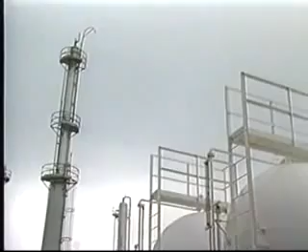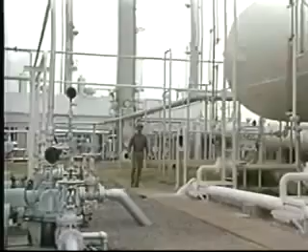This program is about pumps, specifically centrifugal pumps, and their use in oil and gas operations. When you're pumping air, oil, water, or NGLs, all pumps operate on one common principle: they move something from one place to another.

A lot of different types of pumps are used in the petroleum industry, but two kinds are seen most often. Those with pistons or gears are called positive displacement pumps, and those we'll talk about today are centrifugal pumps. Another module focuses on positive displacement pumps, so we won't spend any time on those right now.

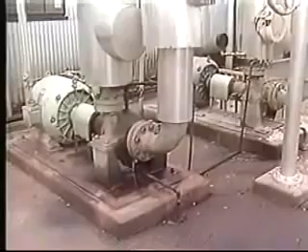So, when are centrifugal pumps used? Usually when you have to move a lot of fluid, like emptying storage tanks, moving processed fluids in gas plants, providing emergency fire water, circulating cooling tower water, and many other applications.

What we're saying is that you'll see and work with centrifugal pumps just about every day. So you need to understand them, and this module will help you do just that.

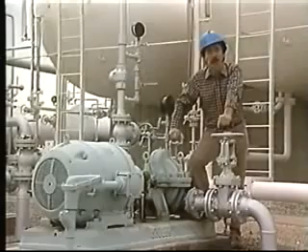This is the first section of a four-section module on centrifugal pump principles. This section introduces the various parts and operations of centrifugal pumps.

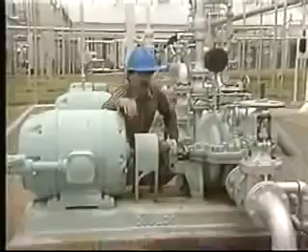Why are centrifugal pumps used so much? Because they're versatile, simple in construction, and relatively inexpensive to buy. They're also easier and less expensive to operate, maintain, and repair. But just what is a centrifugal pump? Let's start by looking at its primary components.

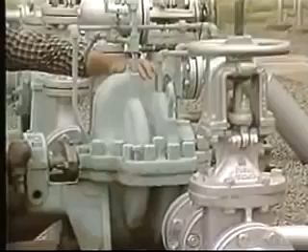When we break it down, we see that a centrifugal pump is actually quite simple, with only six main parts: the casing, the impeller, the shaft, the coupling, the bearings, and the seals, or packing.

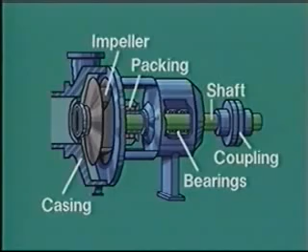Let's look first at the casing. It's the biggest and most obvious part. Its main job is to house and protect the pump parts inside. It can be made from cast iron, steel, bronze, or even special materials if that's what the job calls for.

This is the impeller. It's the part of the centrifugal pump that imparts energy to whatever fluid's being pumped. The impeller is tightly attached to the shaft and rotates at the shaft speed. Impellers can be made from different materials, most commonly cast iron. When corrosive fluids are being pumped, impellers are most often made of stainless steel, plastic, or some special material.

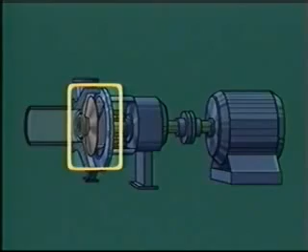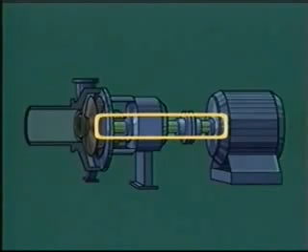This is the shaft. It's connected to a driver, which might be an electric motor, an engine, or a steam turbine. The shaft turns the impeller. Steel is the most common material for shafts.

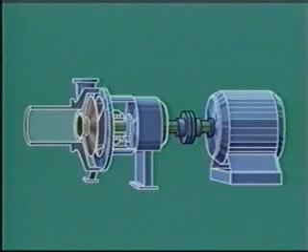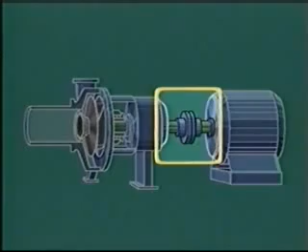Let's stop. Here's the driver. There's the pump itself. What links them? This, the coupling. It connects or couples the driver to the pump, to transmit power from the drive shaft to the pump shaft. Although they might seem simple, couplings are as critical as all the other components. They've got to be strong enough to withstand sudden changes in the pump's load and also those times when the driver might stop.

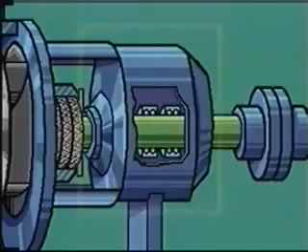Now to bearings. They support the shaft and reduce friction as it rotates in the casing. They do even more: they control the forward and backward thrust movement of the shaft, as well as the shaft's side-to-side, or radial, movement. That keeps the shaft from rubbing against the pump casing. Bearings can be here, in the pump casing on small process pumps, or separated in special housings on larger ones.

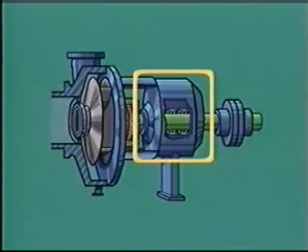Last, are seals, or packing. They're used to stop or cut fluid leakage around the shaft.

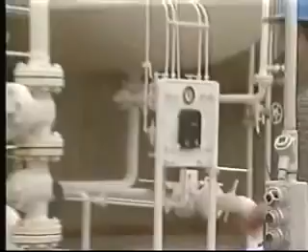That's how a centrifugal pump's built. Now let's see how it works. Centrifugal force is the key. It's that force that tends to move an object away from the center of rotation. Sound too theoretical? A common example will show that you already understand the principle.

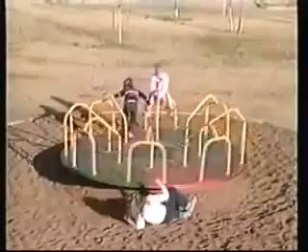The example: children riding a merry-go-round. They spin, and children move outward. As they do, they're subjected to a much stronger outward force that tends to force them off the ride. That outward movement is called centrifugal.

How does this relate to centrifugal pumps? In this way: when a centrifugal pump is working, the impeller rotates. Its blades stir the fluid, making that fluid rotate with the impeller itself. It's like a mini hurricane.

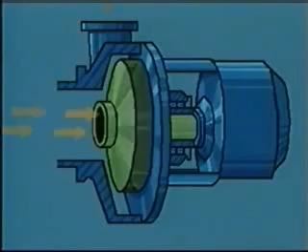The circular motion generates enough force to move the fluid away from the center of the impeller to the tips of the impeller blades. The movement of the fluid to the outside edge of the impeller creates a suction at the eye of the impeller that draws more fluid into the pump.

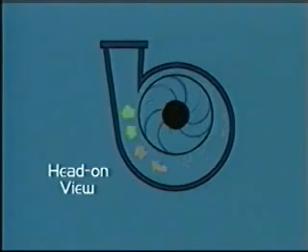If we look at the movement of an impeller, we note that the outside edge of the impeller travels faster than the inside center. So, to stay up with the impeller, the fluid has to move faster as it moves outward. That increases the energy of the fluid.

The fluid leaves the outside edge of the impeller. As it does, what happens? It enters a specially designed area of the casing known as the volute. The volute is wider at the discharge nozzle than where the fluid leaves the impeller.

There's more space, which causes the fluid to slow down. Its velocity decreases. The fluid gives up some of its energy. But that's not all—energy just doesn't disappear. It's converted into pressure, and that pressure forces the fluid out of the discharge nozzle. The fluid leaves the pump at a higher pressure than when it enters.

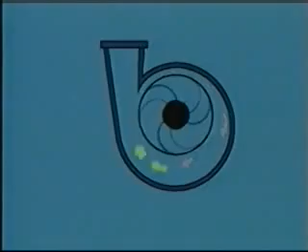So what does all this mean? Centrifugal pumps move fluids by increasing fluid pressure through centrifugal force.